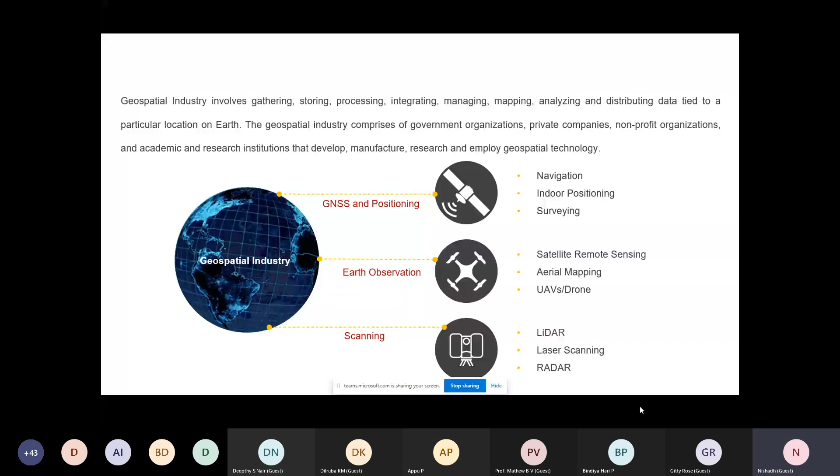So during this presentation, if anything is not clear, or I'm not audible, or you have any doubt, please feel free to stop me at any point of time, so that I am happy to clarify, and we can run this session as an interactive session, so that mutually we can discuss the technology side and how the technology is evolving, where the applications are, all those things. That will give me more attention that yes, the audience are very keen on asking questions. So I am also happy to share my knowledge. Feel free to stop me at any point of time, so the session will be very interactive.

So to start with, I will categorize this presentation into 3-4 things. One, let us see what is a drone and what are the categories of drones available, and how the government of India classifies drones, and if anybody wants to fly drones in India, what is the procedure that needs to be followed. These are the basic things anybody wanting to pursue a career in the drone industry, or wanting to teach students about drones, needs to know.

They need to teach this first, because regulations and safety operations are top priority for the government of India. So I will start with this introduction and the different classifications, and how the government of India classifies drones, and what formalities we need to follow if we operate a drone in India. That will be the first session.

First, the title I will talk under: what is a drone? Drones are formally called UAV, unmanned aerial vehicle, or some people call it an unmanned aircraft system. As per the government of India, they are calling it RPAS, remotely piloted aircraft system. So there are various names given for drones.

You must have seen a lot of drones flying at marriage functions, and for hobbies, people take drones whenever they go for a vacation. But those are photography drones. Here, what we are going to discuss is totally industrial grade and engineering grade drones and their applications. So when people think 'drone' they immediately think of what they've seen at marriage functions. In fact, as per government of India policy, such usage is totally banned. Most people are not aware, and they operate drones wherever they want. That should not happen.

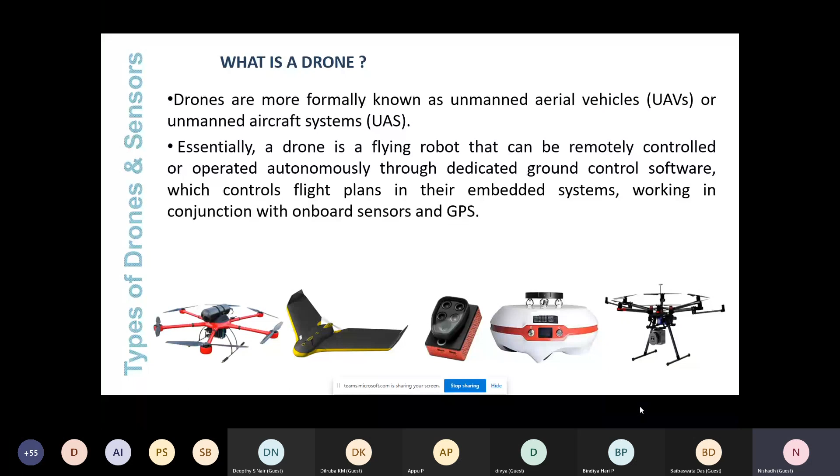So there are a lot of safety aspects in industrial grade drones, which operate with the permission of DGCA. There is a regulation board, and a separate drone vertical has been started by the Directorate General of Civil Aviation. They scrutinize all the specifications, and only then is the drone allowed to fly in the air. So this is very serious business, but at the same time, scientifically, it gives very good information, especially for engineers.

Now coming to different types of drones. What are the different types of drones available in the market right now? One is multi-rotors, which come as octocopter, hexacopter, or quad, having 4 fans or 4 wings. Multi-rotors generally operate like a helicopter; I can give a comparison to a helicopter, like how it operates. The fixed wing drones are the ones that operate like an aircraft.

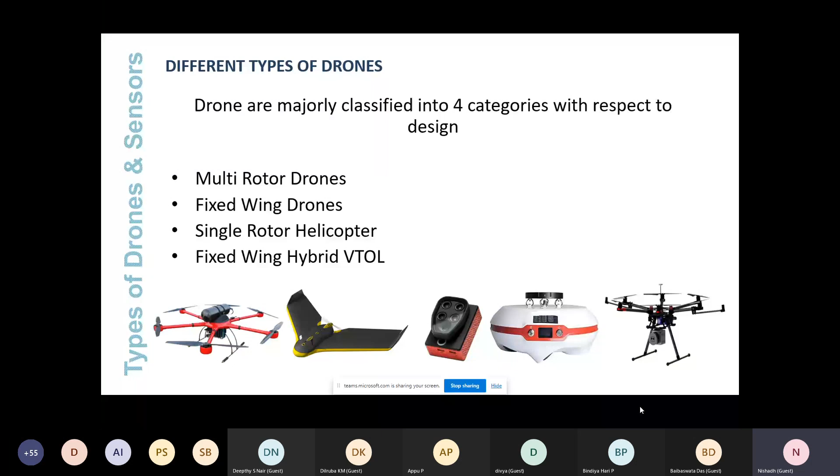There are 2 types of fixed wing drones. One is a fixed wing hybrid VTOL, vertical takeoff and landing drone; it takes off and lands like a helicopter and flies like an aircraft. Then single rotor helicopters are also available. So these are the 4 different types of drones available right now in the market, and how these drones can be classified by the DGCA.

Before going to that, I will show a small video where you can see how multi-rotor and fixed wing drones work. This is the multi-rotor operation.

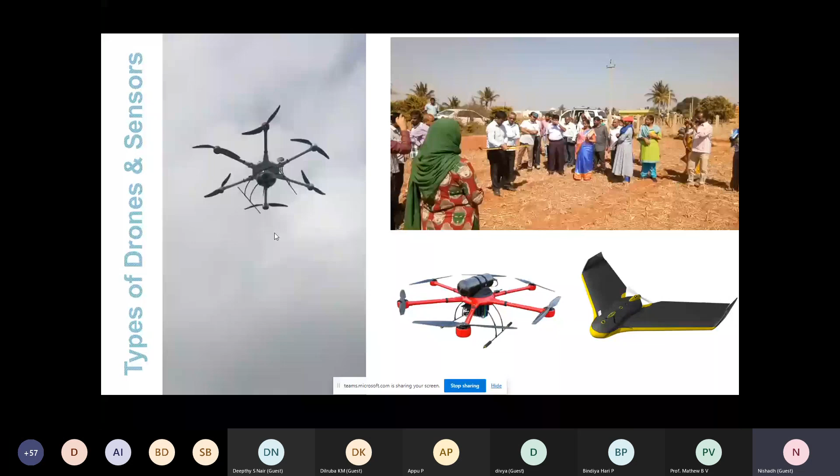On the right side, now you can see another video. It is a fixed wing drone. Generally, it operates like an aircraft.

For large scale mapping, such kind of drones are very much useful. Say for example, in a day you need to cover 10 square kilometers of area for survey, then the fixed wing drones are more suitable.

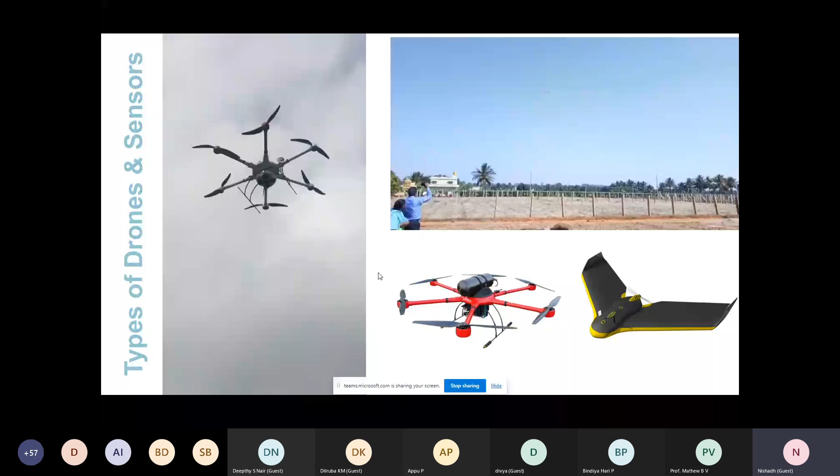And the operation is very simple. One man is enough, so I myself have flown and demonstrated it to a lot of engineers. It works like an aircraft. Just leave the drone, once the propeller is on, then it will go and do the mapping as per the predefined flight plan which is uploaded to the drone.

So now we have seen two different categories of drone vertical and how it operates. Now coming to Government of India, Directorate General of Civil Aviation, how they classified the drones. What we have seen is a general classification, but the Government of India has classified the drones with respect to their weight, including the payload.

The nano drones, that is less than or equal to 250 grams - any drone under 250 grams is called a nano drone. These drones can be used in academic institutions for training and research purposes without any permission, as an indoor operation. Maybe in your ground also you can use it, as long as the weight is less than 250 grams.

And micro drones, from 250 grams to 2 kilograms, are classified as micro drones. For these micro drones, we need to get DGCA approval if you are operating above 400 feet.

Then comes small, this is 2 kilogram to 25 kilogram. For small grade, you must go through all the formalities and procedures with Government of India, especially with the DGCA and Home Ministry, to get all legal approvals, and only then can you fly in whatever zone.

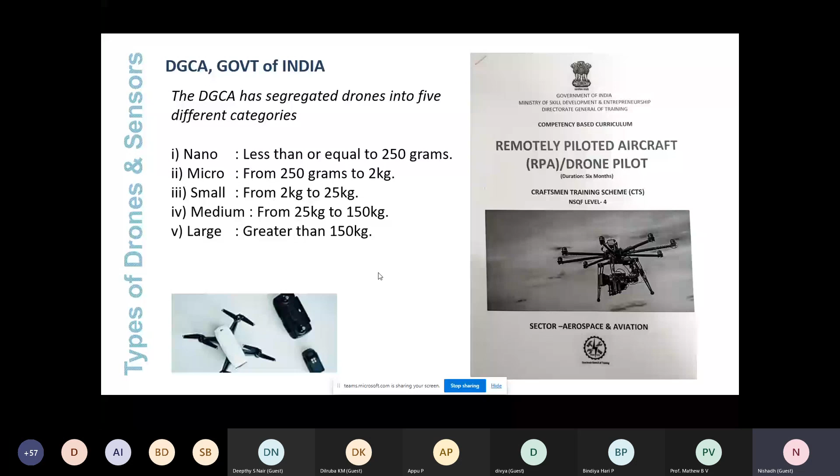So this is about the classification done by the Government of India. And I can say this drone market, how in India it evolves - in 2022, we can expect almost nearly 20,000 crores of economy to boom, especially in the drone industry, with applications in infrastructure development, agriculture, forestry, and of course the power sector.

So what Government of India's statistics say is, in the coming couple of years, almost 250,000 employment opportunities are going to be created, or on a daily basis it is creating jobs in the drone sector. So it is one of the emerging sectors for application engineers.

Now I will play a small video with the DGCA permission, showing legally, if you operate the drone, how the SOP will be.

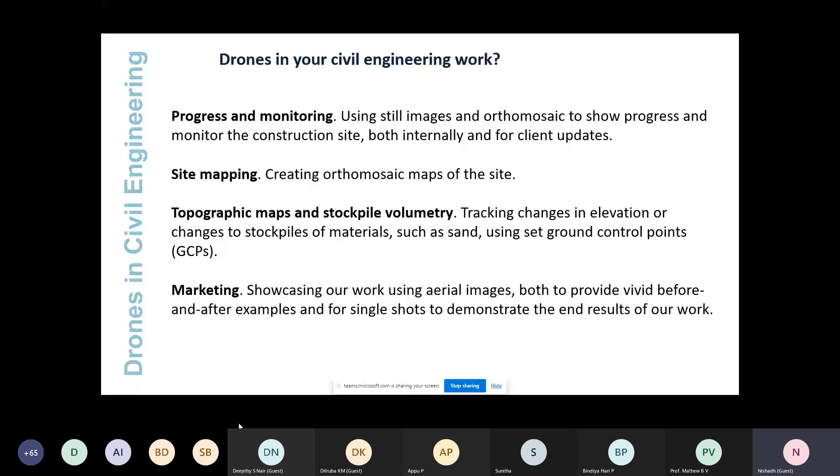Once the flight plan is done, it will be uploaded to the drone, so that the drone will fly and capture the data. Once data capturing is over, we perform aerial triangulation to stitch the different pieces and parts of the images collected by the drone. Once the stitching has happened, then we do some tie points analysis.

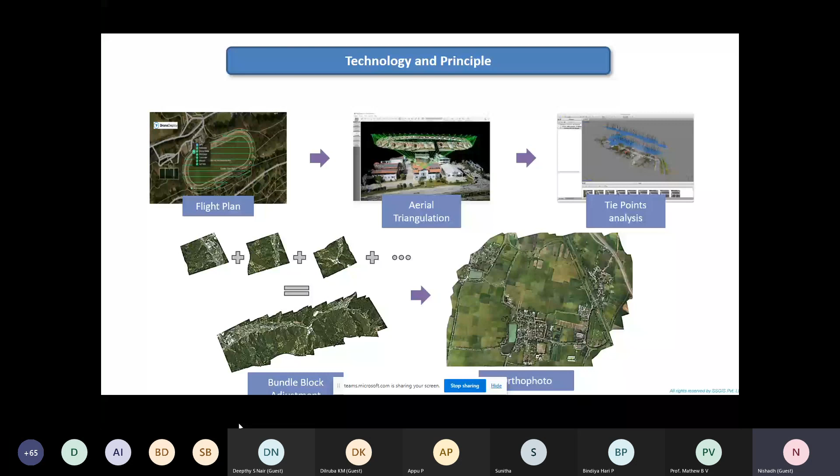Next, once the processing happens, what are the outputs we can get out of it? So we can get unclassified LAS files, which give the point clouds of each and every corner of the building. What is point clouds? Each and every object on the surface will be created as point data, and each point has X, Y, and Z values. X, Y is the coordinate, Z is the elevation value. For any engineering project, elevation is very, very important. So each and every point contains X, Y, Z, that is the LAS file. And then the orthophoto, you will be getting the color orthophoto.

It's a bird's eye view that can be utilized for any analysis and developing the geospatial data. And DTM, that is digital terrain model, bare earth terrain model, eliminating all the surface features like tree, building, whatever available - we can eliminate, and only give the plain earth surface, or how the earth is undulated without the surface features. That is called a terrain model.

Surface model - if you add all the features on the terrain, then that is called a surface model. So in the surface model, terrain will be shown as it is if it is undulating, and also we can show what other features are available on the terrain.

Then 3D mesh model - you can develop entire 3D models, as I told, the oblique cameras utilization is to develop such kind of 3D models. Then we can develop some statistics, that is accuracy level, how the conventional survey accuracy compares with using LiDAR or drone survey accuracy. Then 2D topo maps can be developed for further analysis and processing. So these are the deliverables we can achieve as an industrial grade drone for our day-to-day engineering applications.

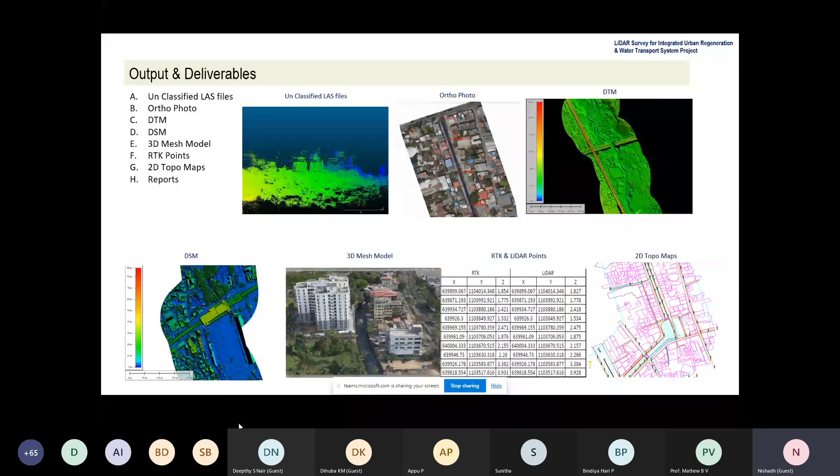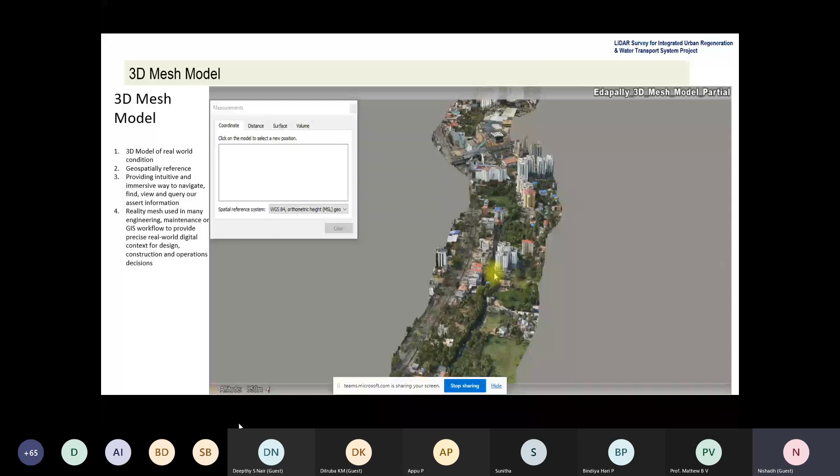So this is another video showing how the 3D model can be developed, and after developing a 3D model, how the measurements can be done. To develop this video, I have done all manual measurements, but generally manual measurements are not required. For our understanding we have developed this video, but all measurements will be automatically done by the software, and whatever data we want, we can get it from the software. For presentation purposes, we have just shown how the measurements can be done after the survey is completed.

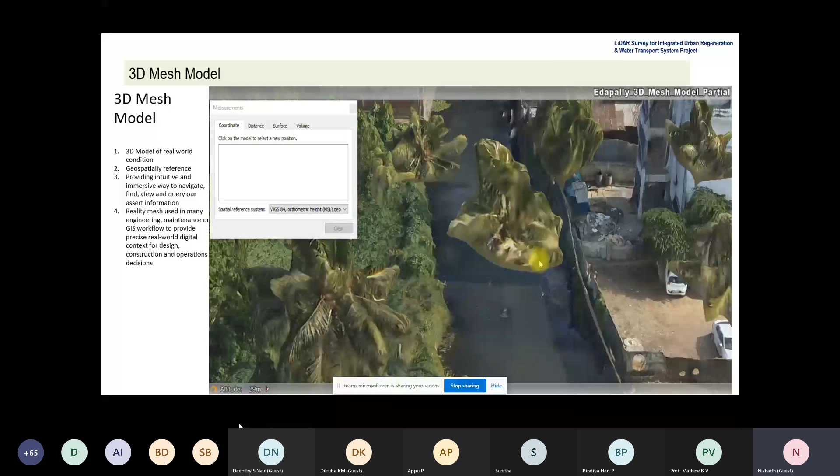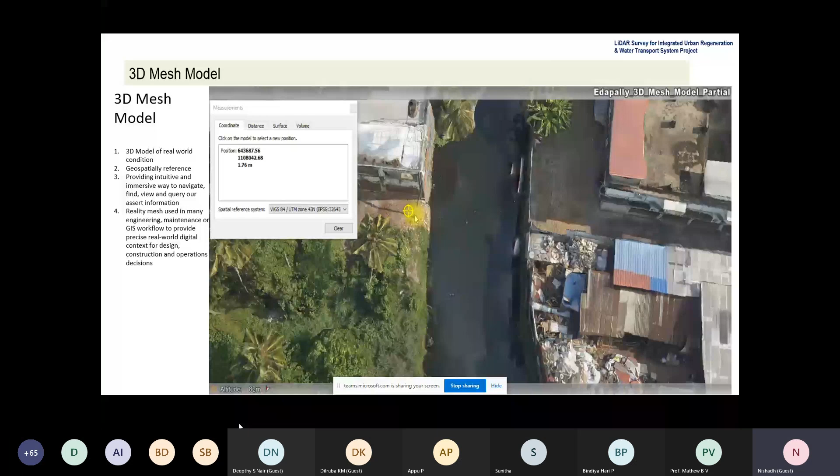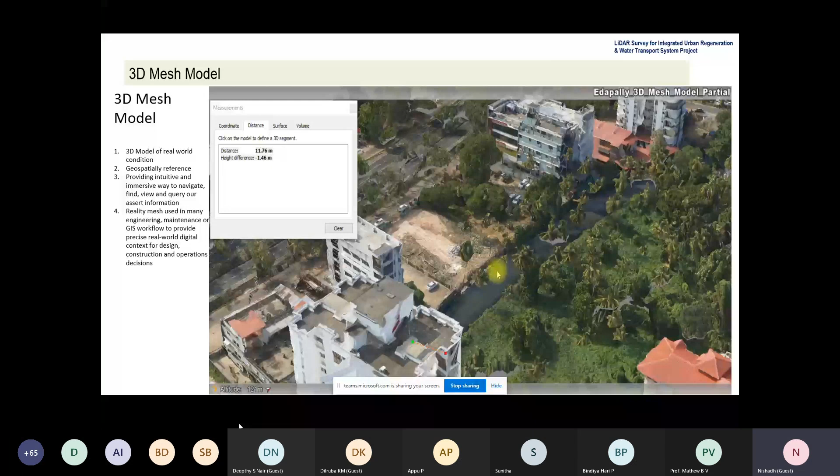Now we can see there is a small area where this canal is going to be widened, or this canal has to be restructured, or some flyover construction is planned. For that, initially they need to plan what encroachment activities are there, and what is the current status of a particular area in terms of linear measurement. Now this measurement is happening, so you can measure the distance as well as the height difference. If there is a slope, what is the starting height, what is the ending height, and what is the slope difference - height difference also we can measure.

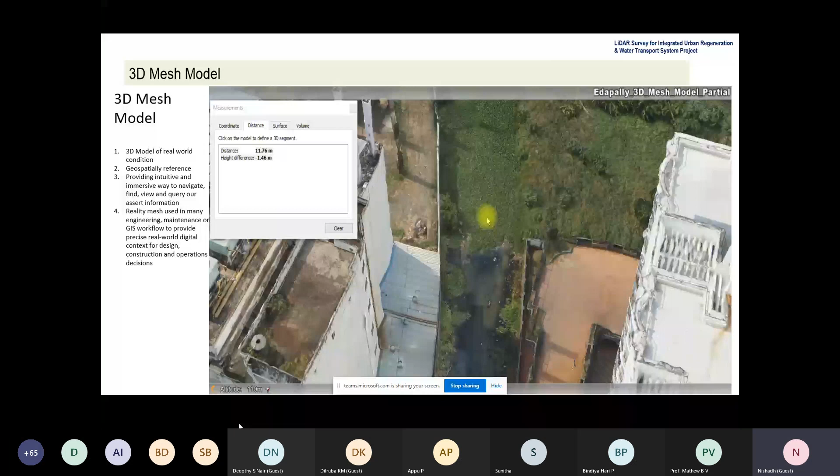So for any project, the initial DPR, detailed project report, is generally developed by the government - mostly civil engineers will develop it. So for them, this technology is very complementing, so that by sitting in the lab they can estimate everything, and also present the visual representation to administrative officers.

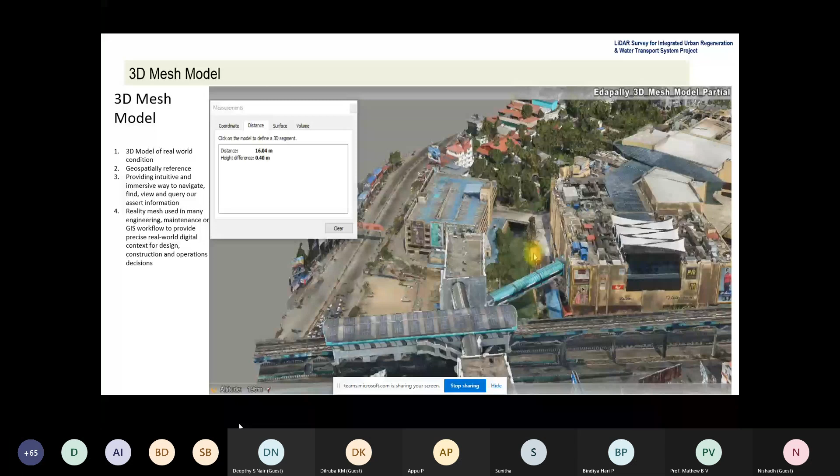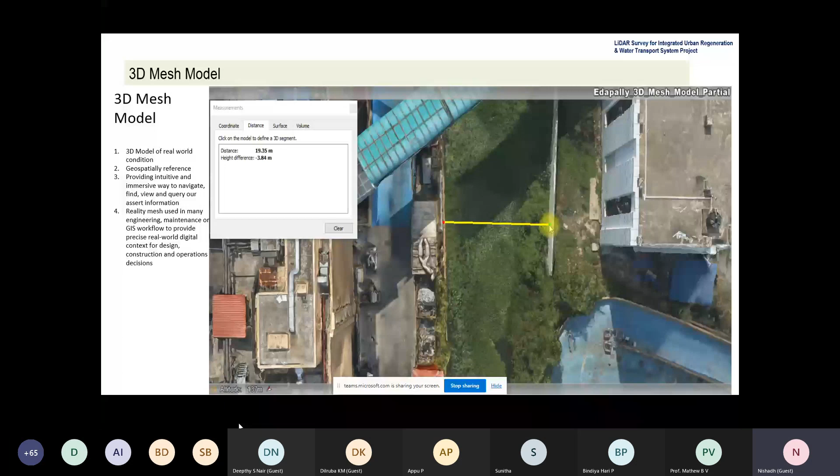This is one of the 3D models developed in Cochin. You can see a couple of areas are inaccessible areas - we even cannot reach those particular areas to measure physically what is the height, what is the width, and all. So this technology gives the opportunity to access the inaccessible areas.

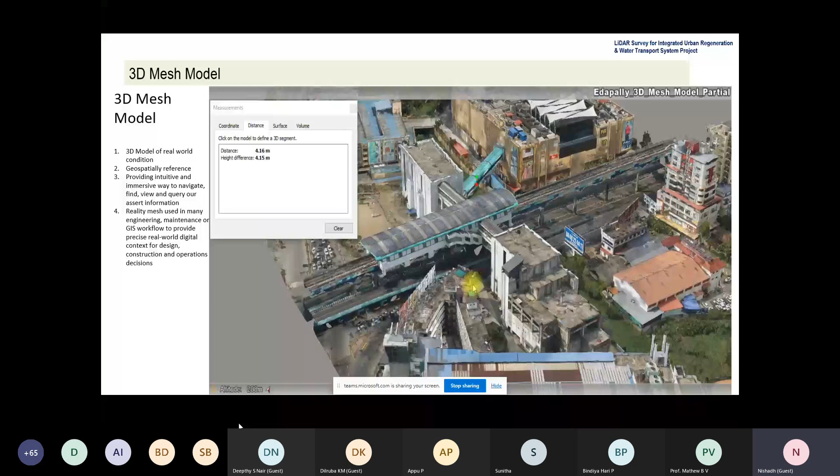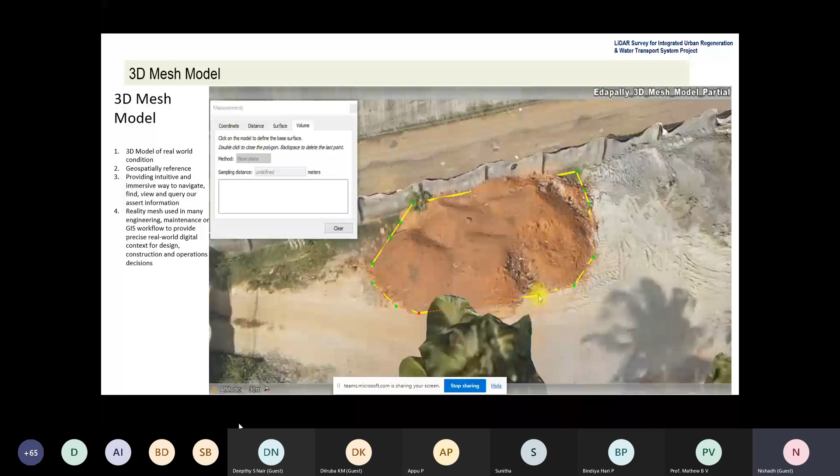So at some construction sites, there is sand dump or blue metal dump material. If anybody asks you how much cubic meters of material is dumped there, you no need to look after the bills and all the things - just put a polygon on the data, and you can see in the measurements window it will give the area and perimeter. Area is 52.63, so cut volume is 27.63 cubic meter, and fill volume also can be measured. Such volume measurements we can do.

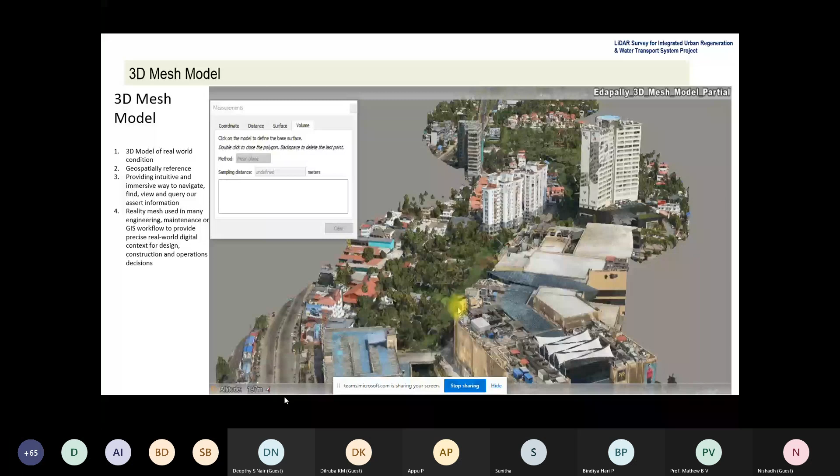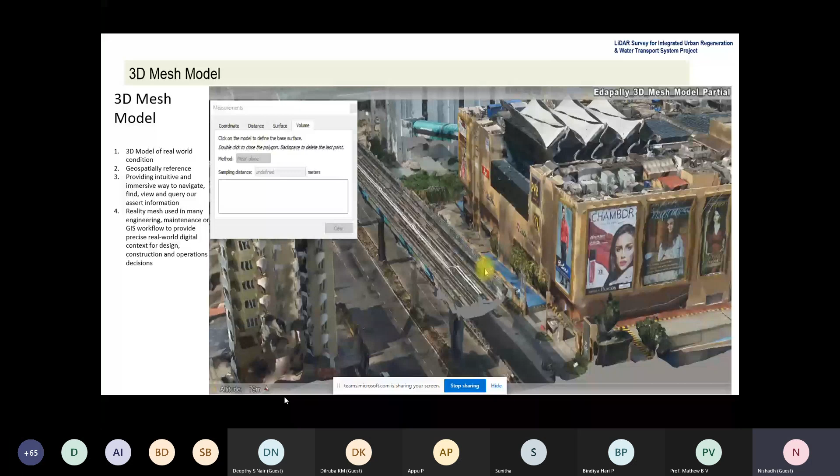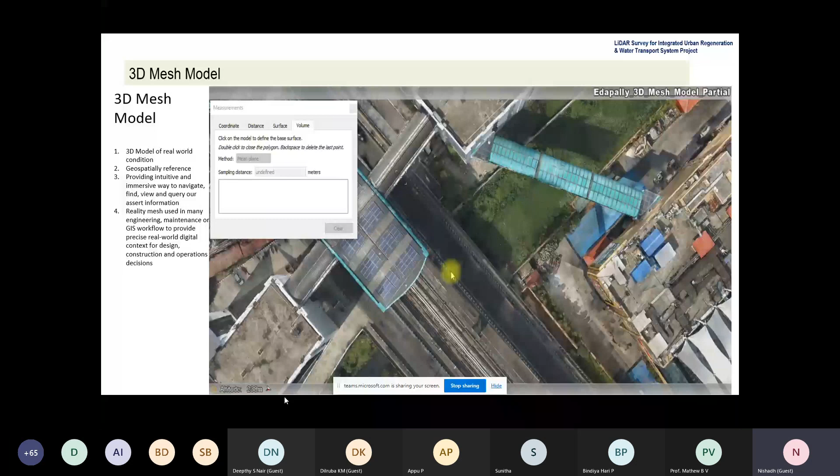So this is a metro rail construction. This metro rail construction is also monitored by drone technology - periodic flying of the drone to check the status of construction activities and the material. Even using drone technology, we can do entire material management of any construction industry.

That's a video representation of how these 3D models from drone images, developed out of oblique images, are very much helpful in any construction industry, and what measurements we can do. What I'm showing is a very limited version - there are a lot of things that can be done from the 3D model which we have developed.

In general construction monitoring, what are the ways people are using drones right now? One is pre-planning - any construction site can be pre-planned, reporting to customers and identifying safety concerns. Safety is the top priority in any construction industry, and tracking progress and identifying potential problems is a very, very important thing - tracking progress of any construction at any given time.

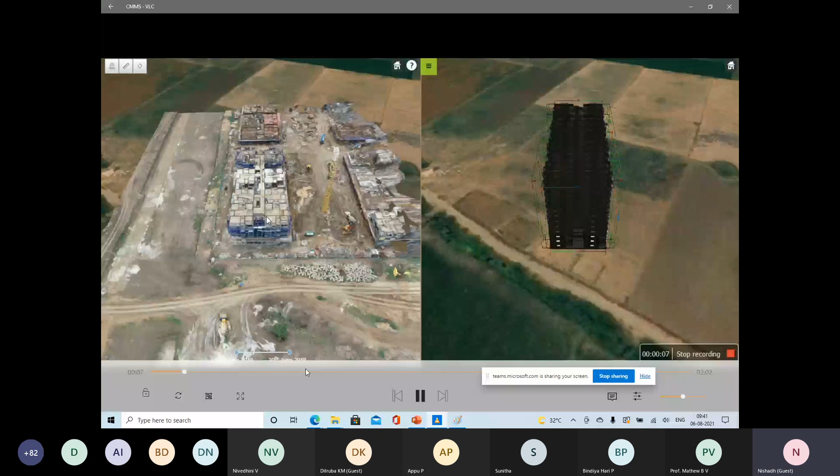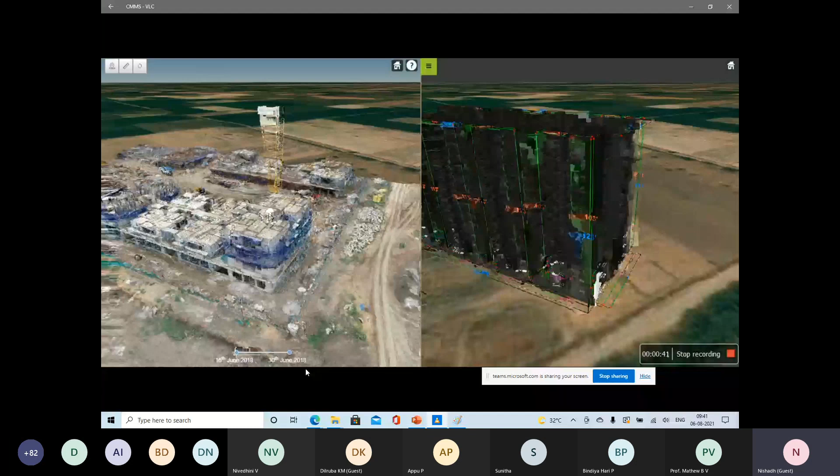This video represents construction monitoring. We have developed an application for how any building construction can be monitored using drone technology. On the left side, you can see L&T's site, which is under construction. Periodically, maybe every 3 months, we fly the drone and develop 3D models. On the right side, you can see the to-be-built diagram developed from CAD files projected in 3D, showing the final construction plan. Now you can see how much construction is completed, and what is yet to be completed.

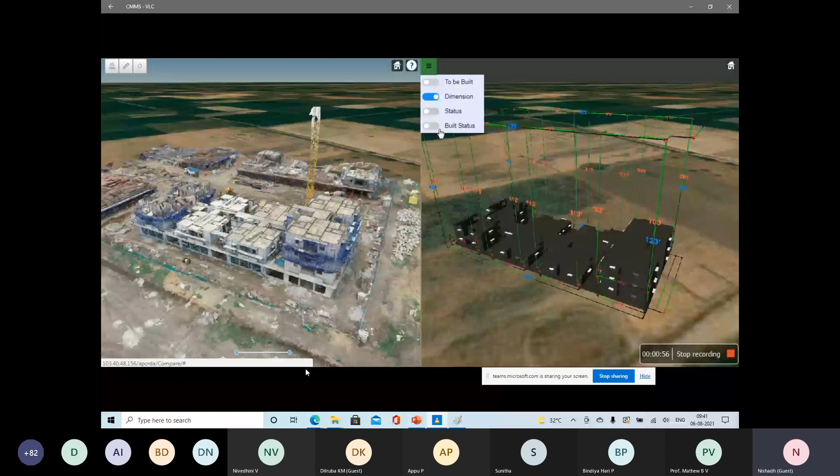This is not just a visual representation; all measurements are available in a dashboard. At any given time, a status dashboard shows what level of floor has completed, the height the construction has reached, the width, material management, how much material is available on site, what milestones have been targeted, and how construction is progressing versus the planned milestones, along with the visual representation.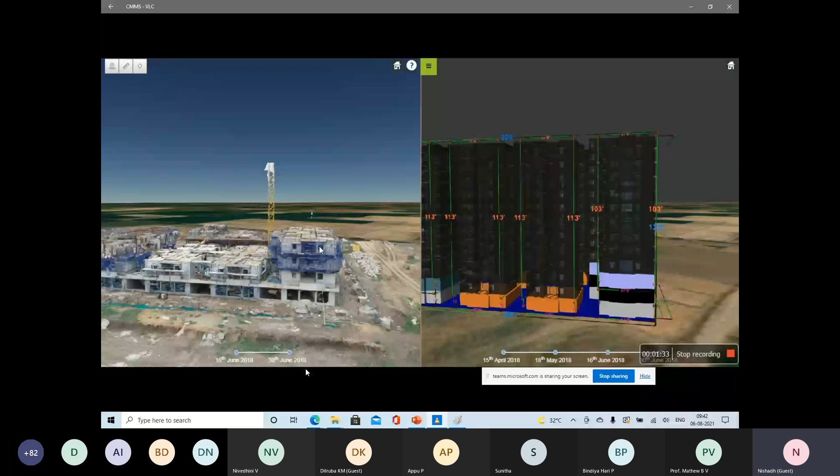Maybe the construction owner or investor is sitting in some other country or place. So every month, this construction monitoring system presents to him a visual understanding of the status.

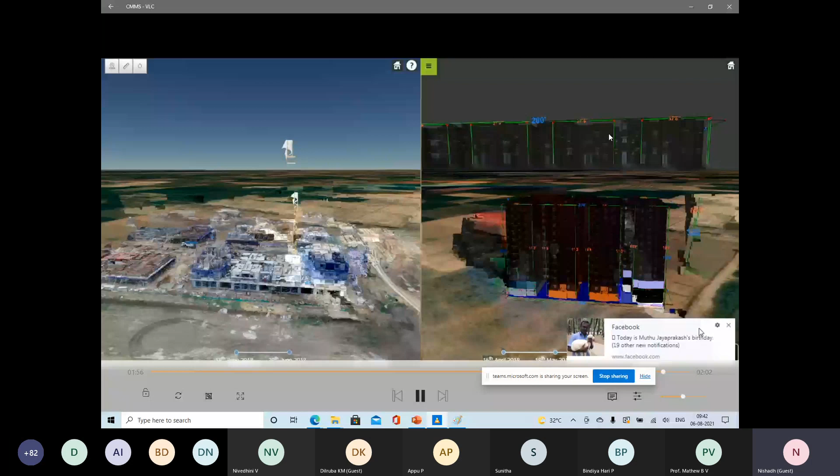This is a very fast growing technology in the civil construction industry, construction monitoring using drones and other APIs, application development in the geospatial server platform. SenseImage is committed to field to finish - that's our concept, providing solutions to the industry. We start from the survey and finish with web applications where administrators, in a single click, can see the status and develop applications over there.

Tracking the progress and identifying potential problems is very important in the day-to-day construction industry. For that, we are developing a 3D orthomosaic, which can be used for all the purposes we have been discussing.

The stockpile measurements, we have already seen. These are a couple of points I need to bring up here, how civil engineers pursuing the construction industry can make use of the technology and apply it in day-to-day activities. This is one of the case studies or dashboards we have developed out of the video you just saw.

This construction monitoring dashboard was developed for Amaravati, the capital region. Right now a different phase of work is going on; there have been a lot of changes in Amaravati, but this was developed a couple of years back. This dashboard represents the status of each and every building construction.

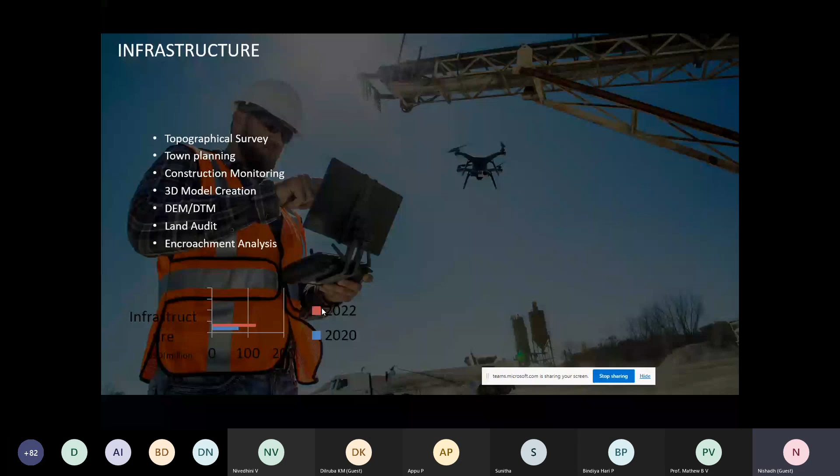This infrastructure industry with drone technology is booming, and it is expected that in 2022 more than 100 million in revenue will be added to the infrastructure industry along with drones, with plenty of employment opportunities coming up. Highways, roads, bridges, and housing will take the lead in drone usage - that's what a couple of PwC studies represent to the government.

So these are some of the statistics representation.

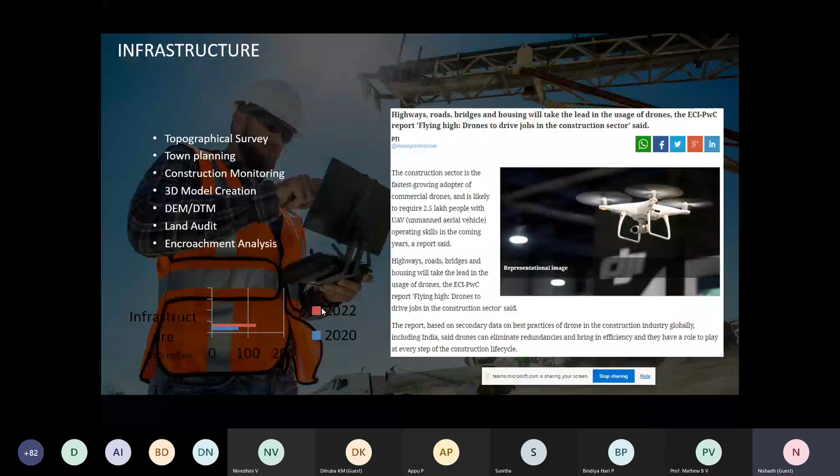So whatever we've seen so far started with the passive sensor - that is natural, using natural light to develop all the 3D models. So far we've seen what a passive sensor mounted on a drone can develop. Now we are moving to a very advanced technology called LiDAR.

Before moving on, regarding the 3D models, passive sensors and construction, if you have any doubts or need any clarification, let's take 5 minutes to discuss, and then we'll move forward.

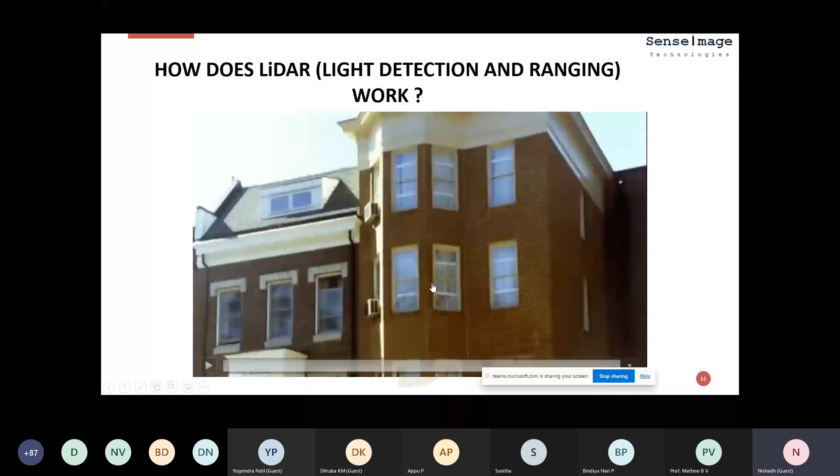So this is how LiDAR works. It sends its light and the emission is recorded, and the entire site or building or any activity will be scanned on the computer. So we get highly accurate, precise readings in terms of XYZ. And what is the accuracy status? Vertical accuracy down to 3 centimeters can be achieved, and positional accuracy will be 1 or 2 centimeters. So it is good enough for any project.

This is another video showing how LiDAR technology is used in infrastructure projects, from one of the projects we have done with the Kerala government.

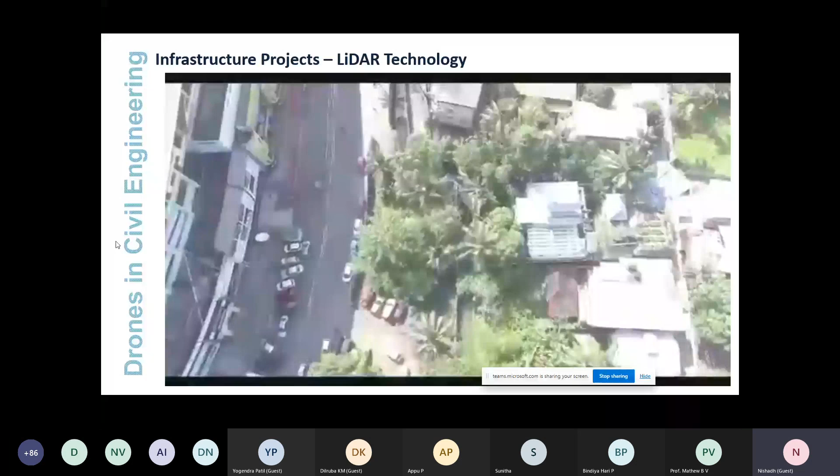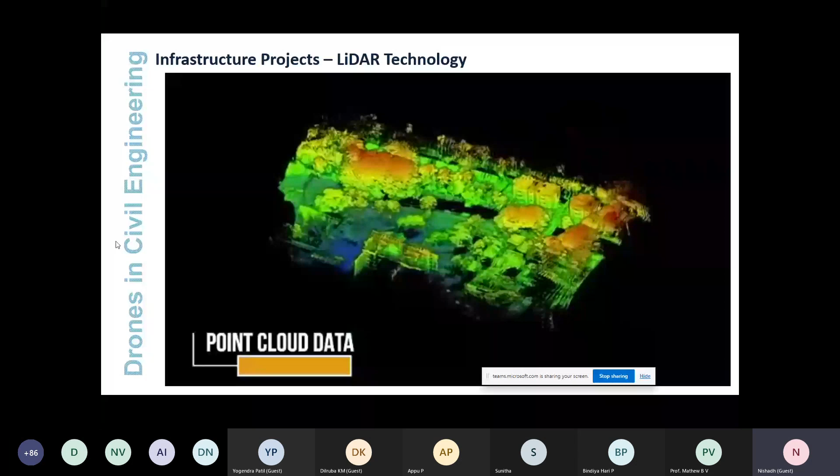So that is how the point cloud data is captured using the drone. In the procedure, we fly a smaller drone for a recce survey to see if there are any disturbances in the air at a particular height, any high-rise buildings or towers. From a safety point of view, we do the recce survey, and then we fly a general LiDAR payload drone to capture the data and develop a detailed database.

Like what you are seeing here is LiDAR in road infrastructure. The data collected by LiDAR technology is very comprehensive, so whatever end-to-end data collection is needed, an engineer revisiting the site for any measurement after the survey is not required. This technology gives a visual representation of photos, point clouds, and everything. So once the survey is over, for planning purposes, going back to the field is not at all necessary.

This system provides designers with a complete picture of the project with accurate point measurements and the ability to locate features that may be inaccessible or missed with other methods, such as clearance height of high tension electricity cables. We may not know where the cables are, and other features that are generally missed during conventional survey. To collect these missed features, we would need to go back to the site.

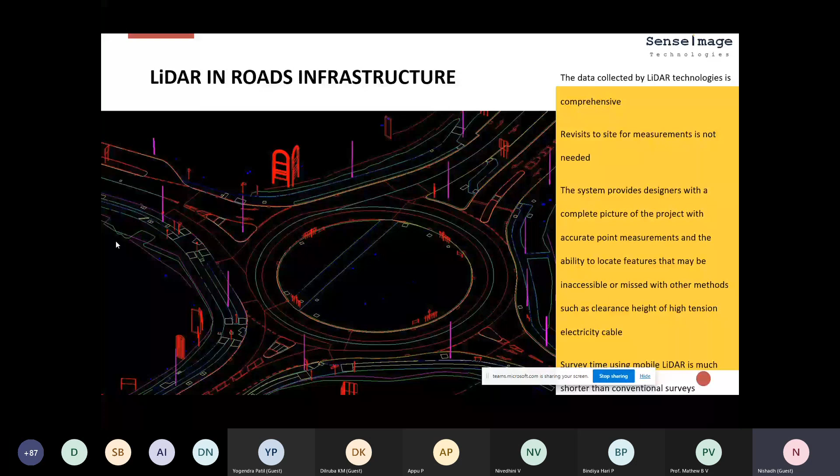Coming to road maintenance, this is a very important point, and most of the time we miss it. After construction or laying of the road, maintenance is very important. Why is maintenance required? Continuous movement of heavy vehicles, rain, and other factors cause damage. So roads mapped through LiDAR technology can identify damage of road pavements, which generally leads to accidents. Periodic monitoring of the road is a top priority of any infrastructure project, so to avoid such damages we need continuous monitoring and maintenance of road pavements.

For that, this mobile LiDAR technology can be used in drones as well as mounted on vehicles, and we can do monitoring.

Why LiDAR is very important is because of its accuracy and the density of point clouds it gives, so the detailing is very high. These scanned data are further analyzed to generate road pavement profiles along with crack patterns and road markings. Wherever cracks are there, you can identify and study the crack pattern, and take probable measures and suitable applications there.

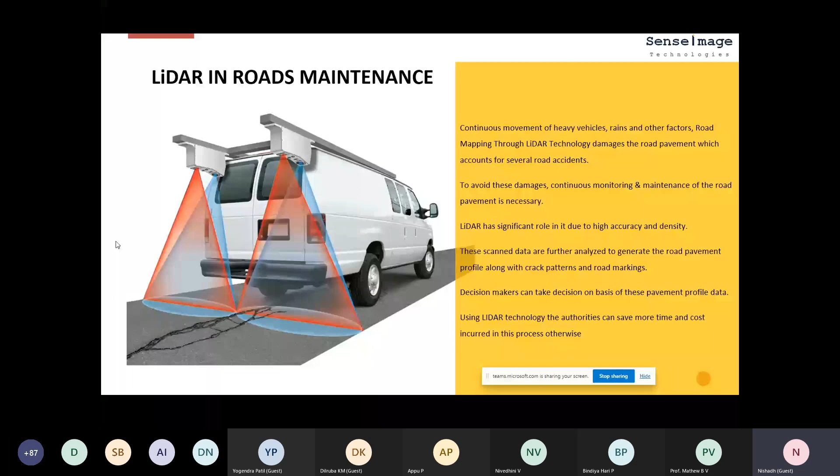In maintenance also, advanced technologies should be used to avoid damages. So in general, we are talking about the technology, why we need to move to drone, mobile LiDAR and sensors, because there are some challenges in using conventional surveying techniques. One is the speed, the time-bound nature of the projects, so conventional survey will take a longer time than modern survey techniques.

When we talk about modern survey, let me give you another input here. There are a lot of faculties in this session. For your information, all the states' land records and revenue departments, the surveying and land record department, are coming up with modern survey to do a resurvey of the entire state.

This opportunity is now the hot topic in the industry because it demands more than 150 surveyors, civil surveyors, in each and every district for such kind of work. So there are plenty of openings coming up in the modernization process of survey and land records. How can we do this big volume of survey? Conventional alone is not possible, it will take at least 20 years to complete entire India. So adopting modern technology and modern survey techniques is a very crucial and important decision, as the Government of India has taken, and they allowed drone technology to do the resurvey of the entire country.

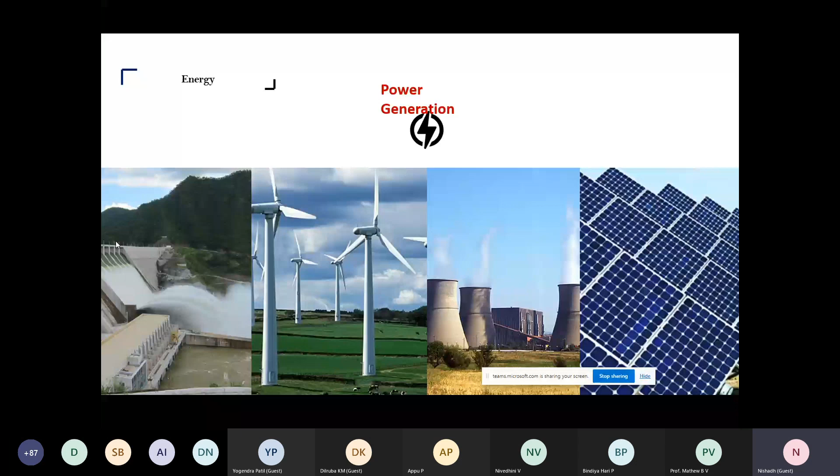So with that, the discussion on how LiDAR technology is used and all those things has been completed. If anybody has any clarifications or questions on LiDAR technology or anything else we've discussed so far from the start, let me take 5 minutes or a couple of minutes to answer. Otherwise, I will move on to a couple of case studies before closing my presentation. So, if there are any questions, please go ahead.

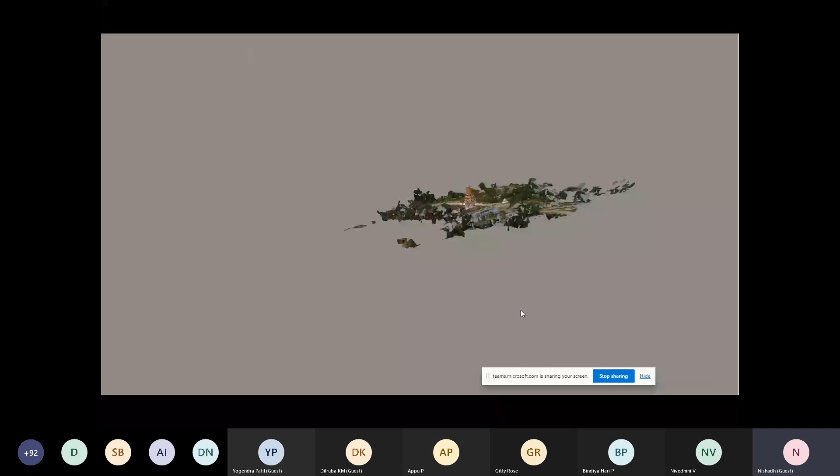Now we have talked, spoken, and discussed a lot on civil applications. These drones can even be used for heritage structures, archaeology, and tourism. There's a small case study - one of the temples in Warangal, where we created a 3D model of the temple, so that we can develop accurate 3D models and preserve the architecture they have developed. If there is any damage, periodically we can develop this, identify issues, and do maintenance. So preserving our architecture is very, very important - for that, this is how the technology is used.

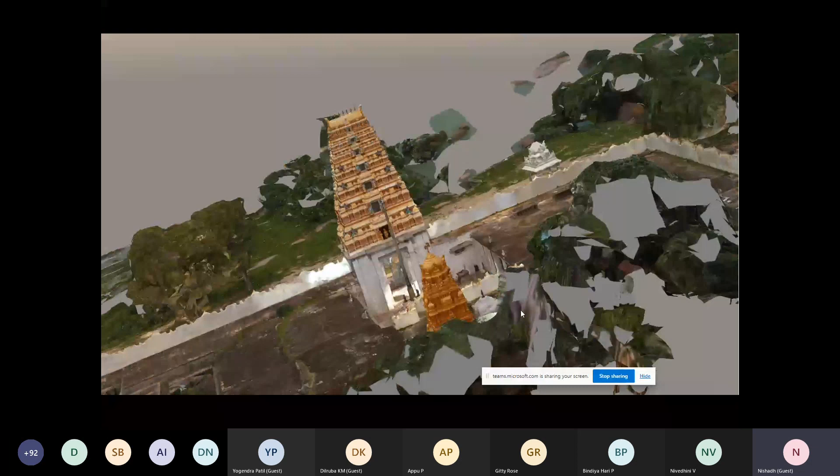So in that case study, we chose one temple in Warangal district, and then developed a 3D model and presented the case. You can see the level of detail, and this is not just visual videographs - we can have all the measurements.

I think he's gone for a walk.

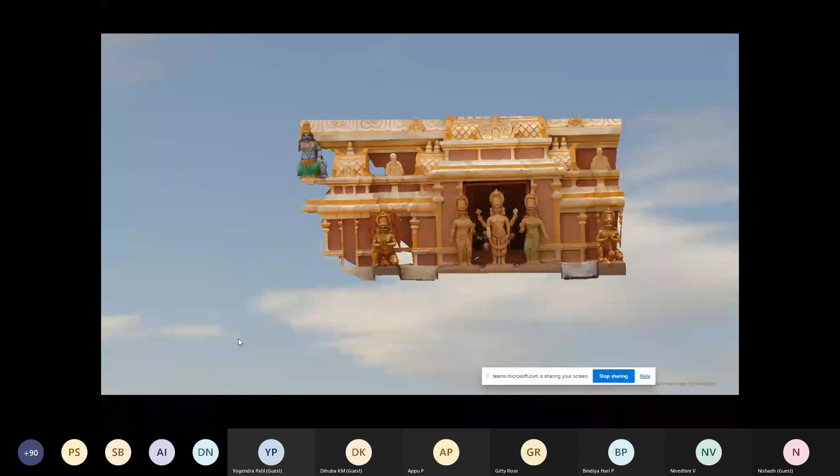After heritage and archaeology, apart from civil engineering applications, drones are now widely used in agriculture. Irrigation is another vertical where drone technology is contributing heavily. And in agriculture, spraying activities are now very familiar and famous, booming like anything.

What is the benefit of using drones for spraying? Uniform spray, less usage of pesticides and chemicals, and these chemicals won't reach the soil, so soil will be preserved. We have done varieties of case studies on it, and it gives good yield and good results.

These drones have multispectral and hyperspectral cameras, so we can validate plant health, plant growth, and chlorophyll content, and do stress analysis, and then suitable decisions can be taken to improve the cultivation process. Crop supervision and crop maintenance is another area where drone technology is well utilized in agriculture.

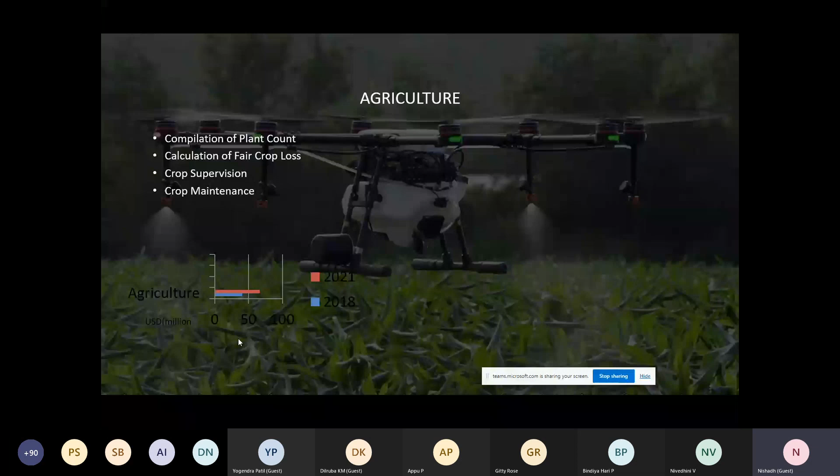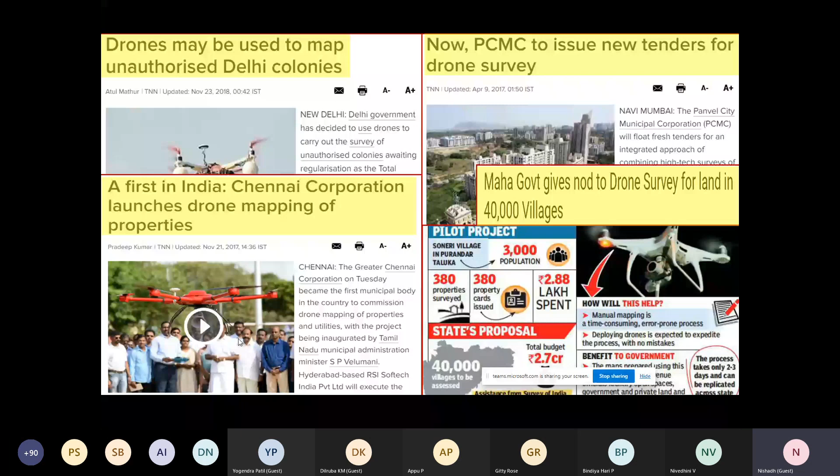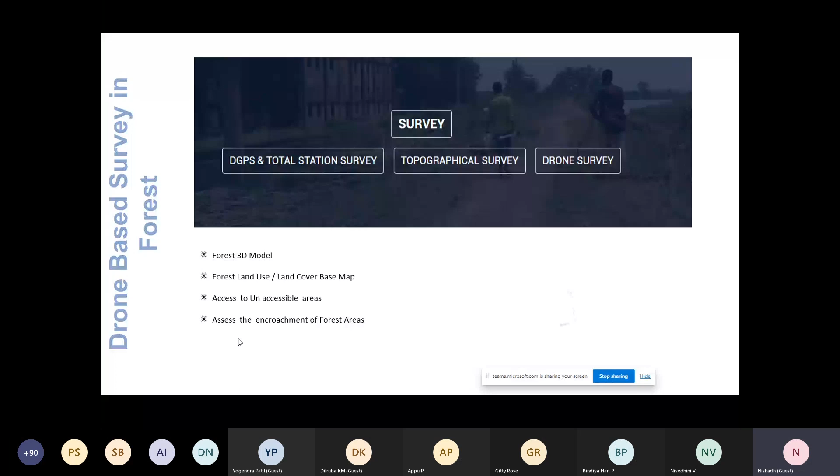Forest is another vertical where forest boundary survey is very challenging in India. Manual operations for surveying the forest boundary are very difficult, so drones are complementing this. Some governments have already taken initiatives for forest mapping using drones. Here is a small video.

Apart from mapping, we can also do inspections, either day or night, using day-night cameras to monitor unauthorized movement in the forest. Even for animal counting, people are now starting to use drones.

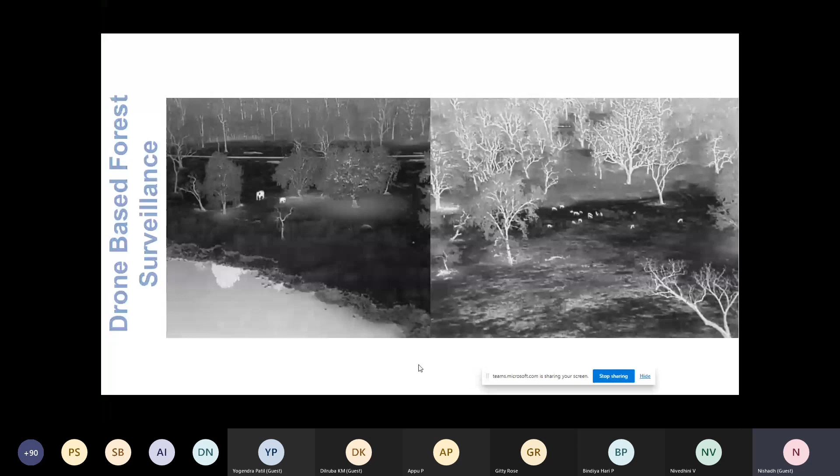You can see some night-time and daytime videos here showing elephants and other animals. Even if they hide behind a tree, using thermal sensors we can see what is happening inside the forest.

This is purely from an inspection point of view, not tied to any specific civil application. This is just to show common applications of drones for inspection, such as power line inspection and oil and gas inspection using such sensors.

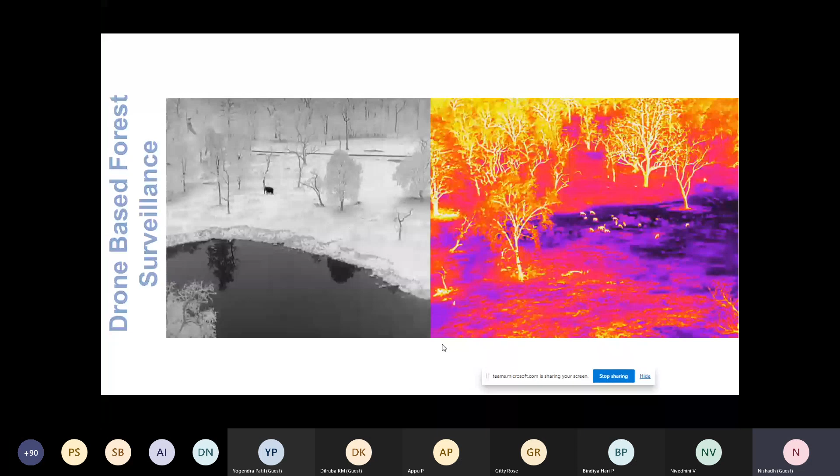So, coming to which departments are currently maximizing their usage of drone technology: one is Indian Railway. Most of the projects Indian Railway is presently implementing use drones, and WAPCOS uses them for flood-related analysis and water irrigation infrastructure.

WAPCOS is utilizing drones with LiDAR technology, giving out a lot of projects based on drone-based LiDAR or manned aircraft-based LiDAR technology.

Smart cities is another big vertical predominantly using drones for city development. In AMRUT cities, that's the Atal Mission for Rejuvenation and Urban Transformation, the guideline itself states that drone technology only should be used for such projects.

The Ministry of Agriculture and the National Highway Authority—you would have seen the recent news from last month—the National Highway Authority has made it mandatory to use drones to monitor all highway projects.

Urban development under Pradhan Mantri Awas Yojana needs to utilize drone technology. The Survey of India is now procuring a lot of drones for village mapping. Also, the Sagarmala projects implemented across coastal boundaries are now implementing drone-related applications.

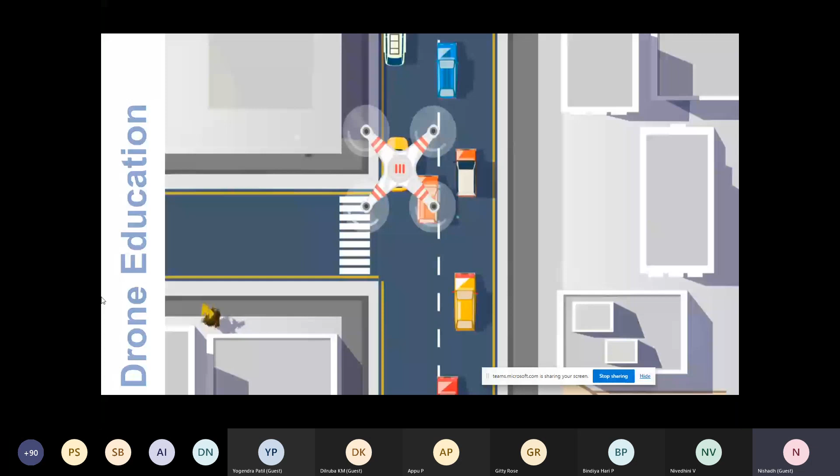Filming and journalism: the world of media is really using drones to replace aerial footage, providing broadcasts that are becoming increasingly common and covering large areas quickly. Shipping and delivery: medical drugs and food orders can be shipped within a span of a few minutes, with drones delivering packages with less error and more accuracy.

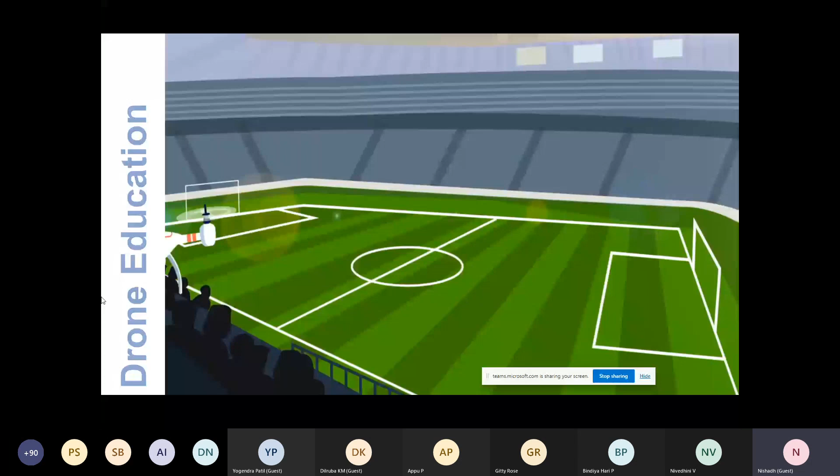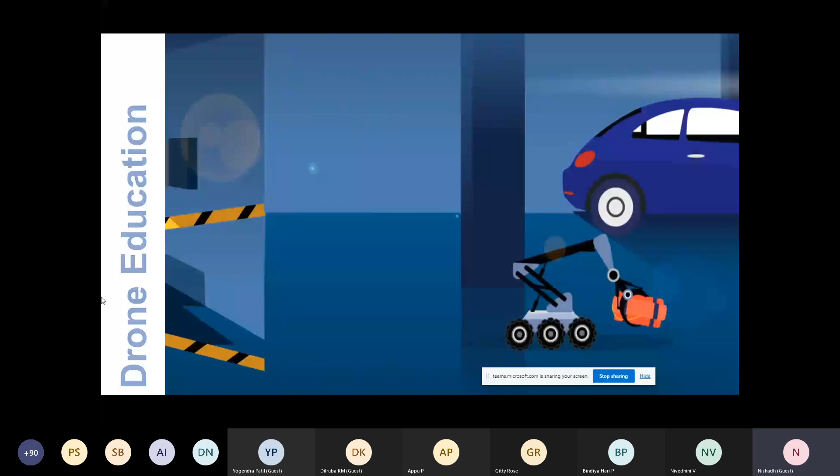So with that final video, I will sum up my presentation. We started with different types of drones and their classification, then passive and active sensors, and the legal formalities needed to operate drones. And we've seen how drones are used with passive sensors for different industries, along with a couple of 3D models and their applications in infrastructure projects.

Then, from an accuracy standpoint, we saw how sensors evolved to LiDAR technology and how LiDAR benefits infrastructure projects. Beyond infrastructure, drones can be utilized for different applications like inspection and agriculture, among other things.

In the last slide, we saw that drones can be widely used for surveillance, law and order enforcement, and oil and gas. There are multiple verticals other than infrastructure projects where this technology can be utilized.

So with that note, I will conclude my presentation, though we have enough time to continue. If you have any clarification, let me open it up for discussion.